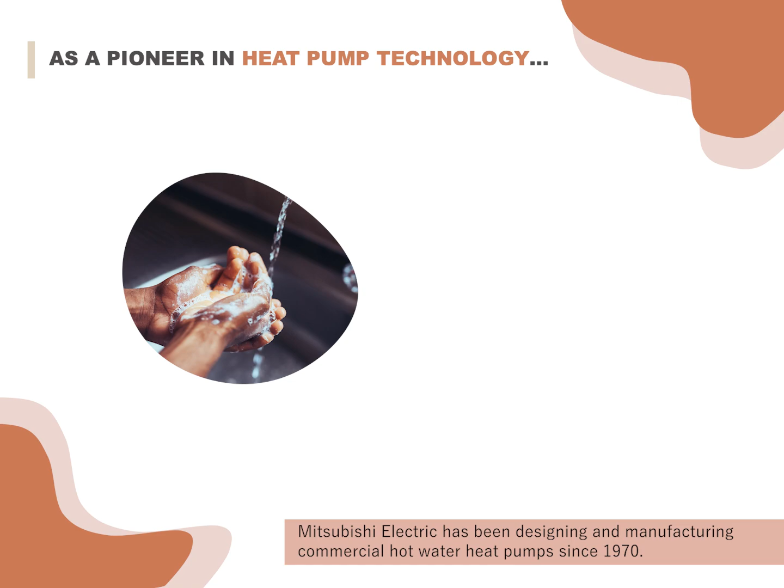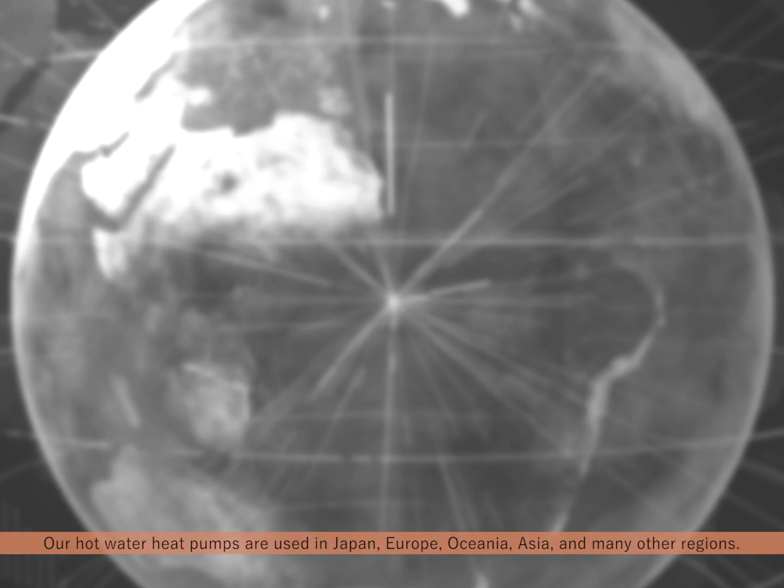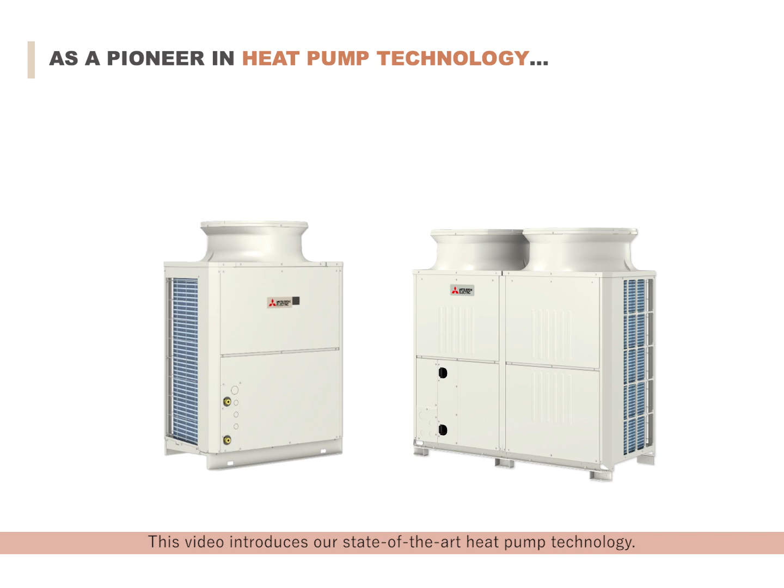Mitsubishi Electric has been designing and manufacturing commercial hot water heat pumps since 1970. We were one of the first manufacturers in Japan to utilize heat pump technology to supply hot water. Our hot water heat pumps are used in Japan, Europe, Oceania, Asia, and many other regions. As a pioneer in heat pump technology, we would continue to lead the industry. This video introduces our state-of-the-art heat pump technology.

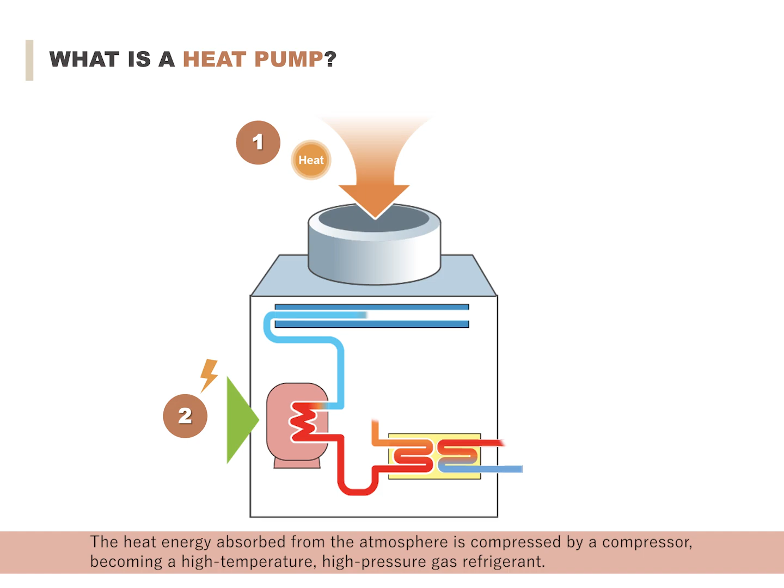First, let us explain how heat pumps work. Heat pumps absorb heat energy from the atmosphere and transfer this energy into refrigerant. The heat energy absorbed from the atmosphere is compressed by a compressor, becoming a high-temperature, high-pressure gas refrigerant. Then the gas exchanges heat with incoming water through a heat exchanger. The water heated by the heat exchange is stored in a tank and used when hot water is supplied.

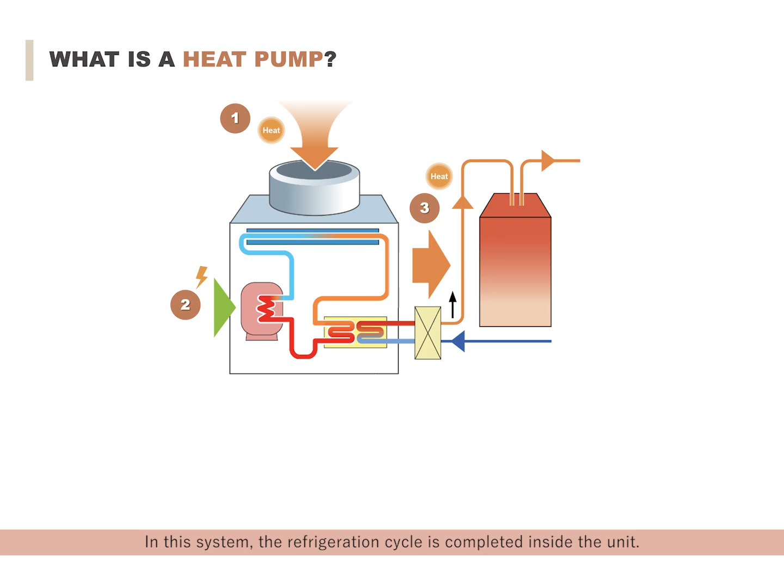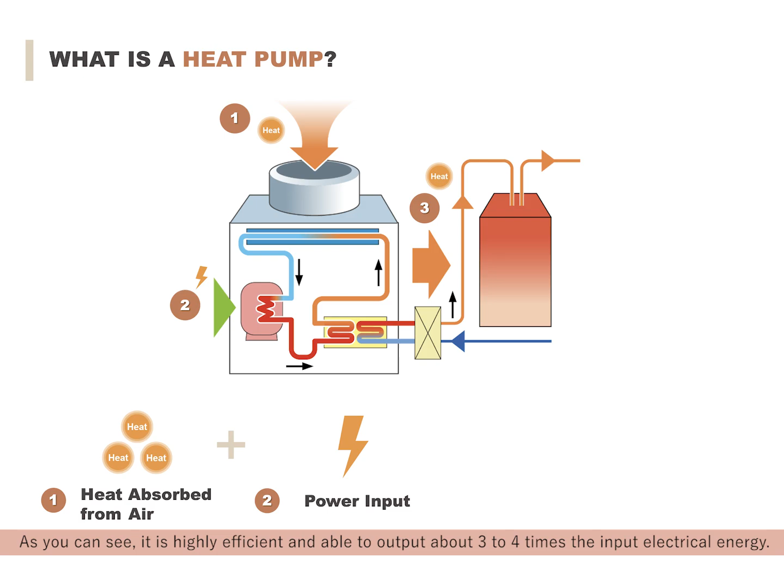In this system, the refrigeration cycle is completed inside the unit. Therefore, the refrigerant does not go to the tank or to the place where you use hot water. As you can see, it is highly efficient and able to output about 3 to 4 times the input electrical energy.

What are the benefits of heat pumps? Firstly, since heat pumps heat water with electricity, you can contribute to a significant reduction in CO2 emissions. Secondly, heat pumps are safe and clean thanks to the non-combustion system which does not discharge toxic substances.

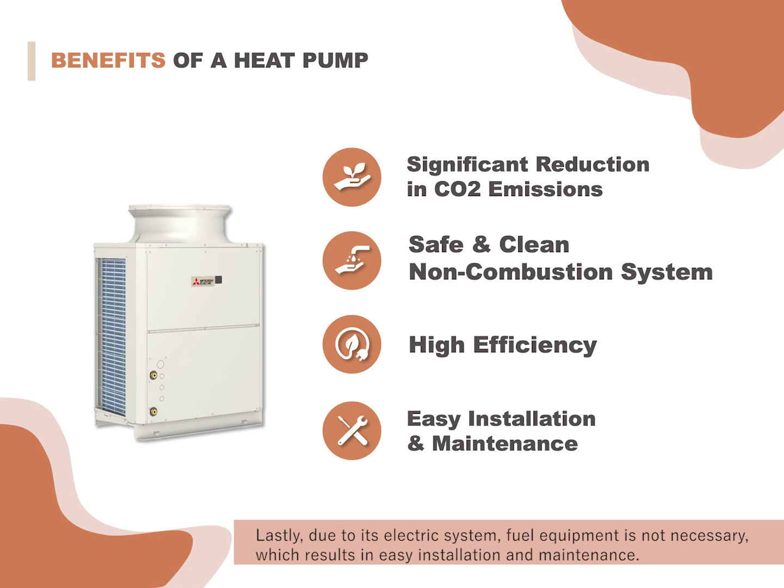Additionally, heat pumps output 3 to 4 times the input electrical energy, so their high efficiency allows you to reduce running costs. Lastly, due to its electric system, fuel equipment is not necessary, resulting in easy installation and maintenance. With a system controller, centralized control is also available, so you can remotely monitor each unit and adjust the desired temperature and amount of water.

Now let's look at the benefits of a heat pump more deeply compared to gas boilers and electric water heaters. To begin with, heat pumps' high energy efficiency is the most significant point. As for energy efficiency, gas boilers and electric water heaters are less efficient. Gas boilers are operated according to the load, resulting in frequent starts, stops and increased fuel consumption. Also, since electric water heaters use a heater, it inefficiently consumes electricity.

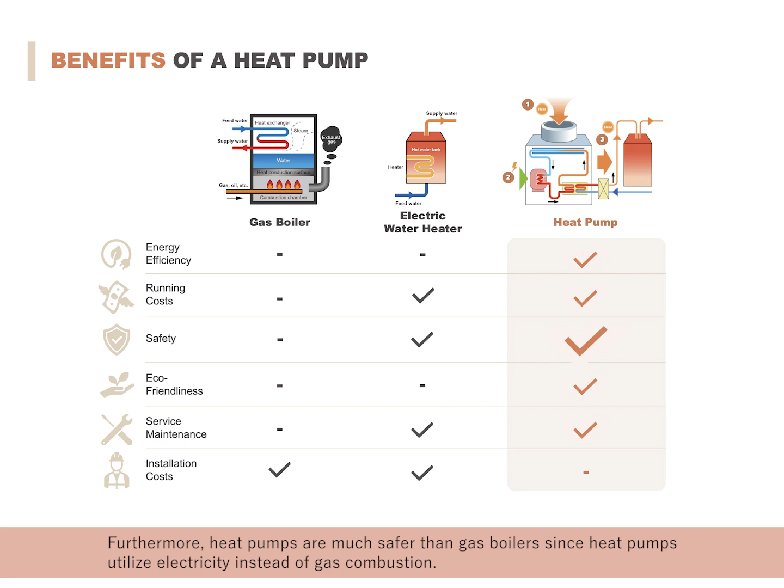On the other hand, thanks to the heat pump system, we can achieve an output of about 3 to 4 times the input electrical energy. With the highly efficient heat pump system, you can significantly save the running costs. Furthermore, heat pumps are much safer than gas boilers since heat pumps utilize electricity instead of gas combustion. Heat pumps with no combustion system achieve less emission of CO2, contributing to eco-friendliness.

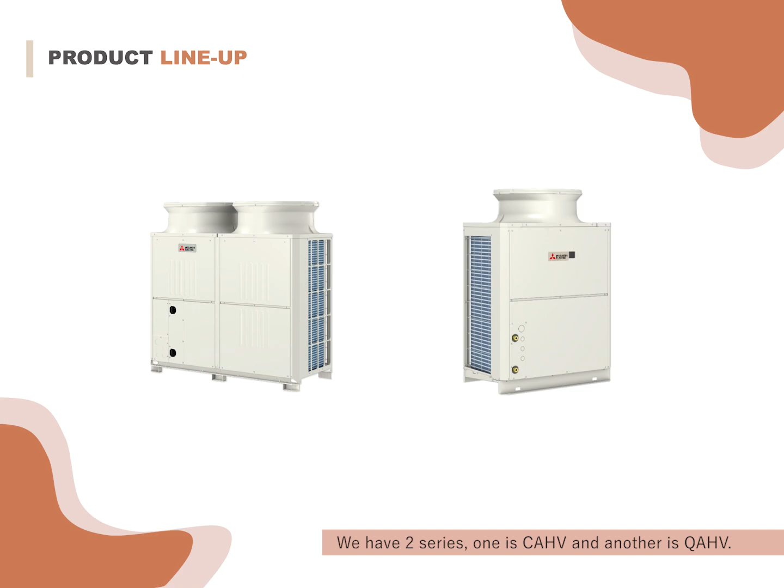Here is our product lineup of hot water heat pumps. We have 2 series, one is CAHV and another is QAHV. The biggest difference is the available outlet hot water temperature. While CAHV can achieve 70 degrees Celsius with R454C refrigerant, QAHV can achieve 90 degrees Celsius with R744 refrigerant.

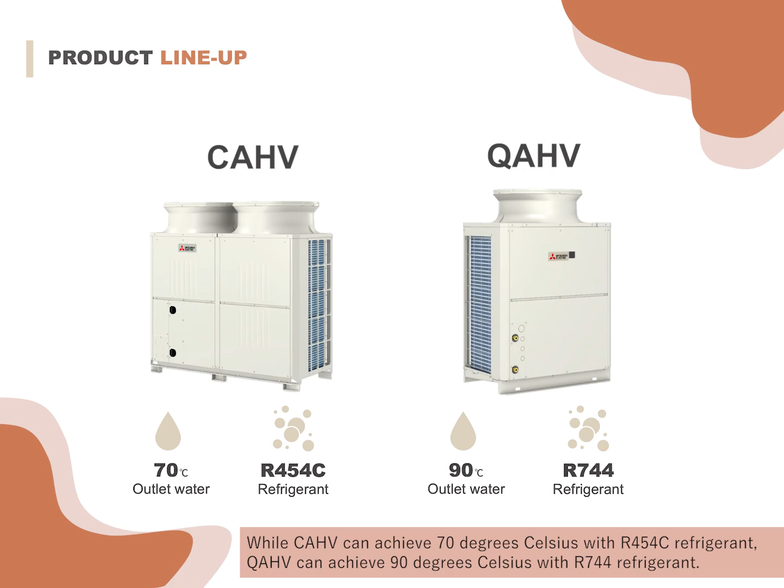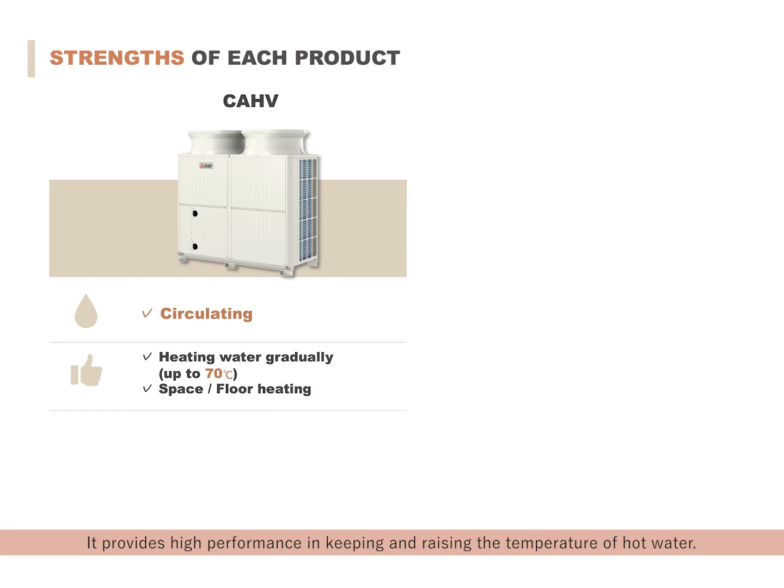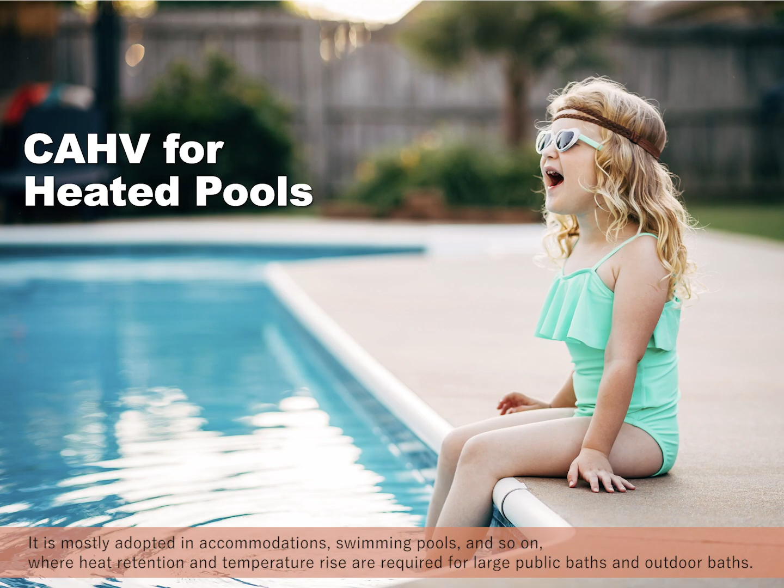Let us briefly explain our 2 types of hot water heat pumps. On the left is CAHV, a circulating hot water heat pump. It provides high performance in keeping and raising the temperature of hot water. It is mostly adopted in accommodations, swimming pools, and so on, where heat retention and temperature rise are required for large public baths and outdoor baths. Not only that, it is utilized for space and floor heating when connected to radiators on site.

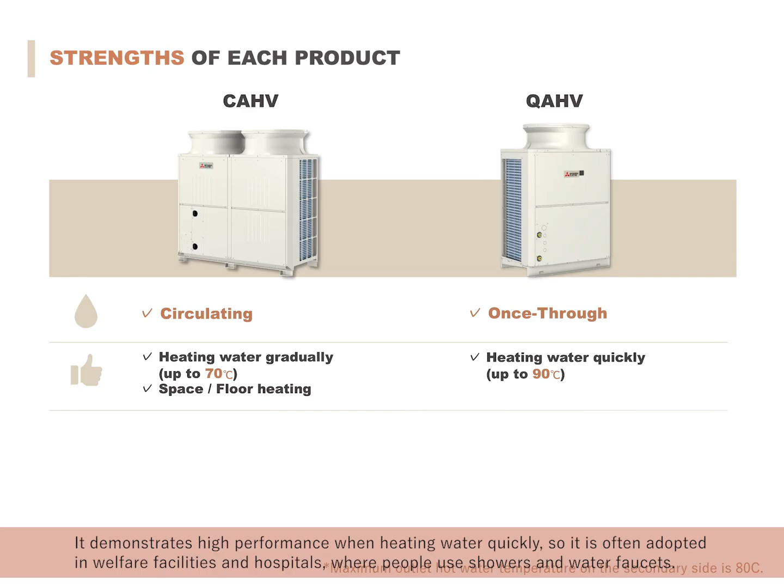On the right is QAHV, a once-through hot water heat pump. It demonstrates high performance when heating water quickly, so it is often adopted in welfare facilities and hospitals, where people use showers and water faucets. Thanks to these features, we can offer suitable products to each facility depending on the purpose.

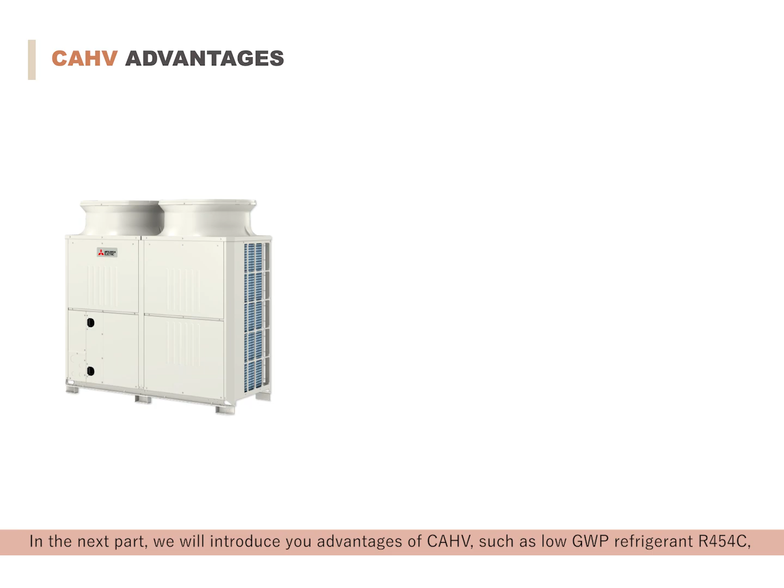Now let's look at each product more deeply. In the next part, we will introduce you to the advantages of CAHV, such as low GWP refrigerant R454C, new compressor, wide temperature range, highly efficient control, and low maintenance and design flexibility.

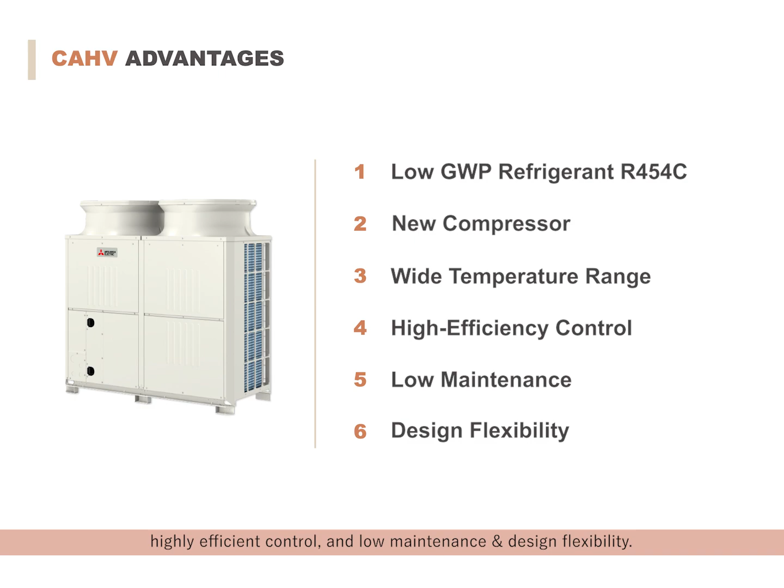Our CAHV adopts the low global warming potential refrigerant R454C. Thanks to this eco-friendly refrigerant, we contribute to the significant reduction of CO2 emissions. In Europe, the F-gas regulation is going to be implemented to prevent global warming and unwanted climate changes.

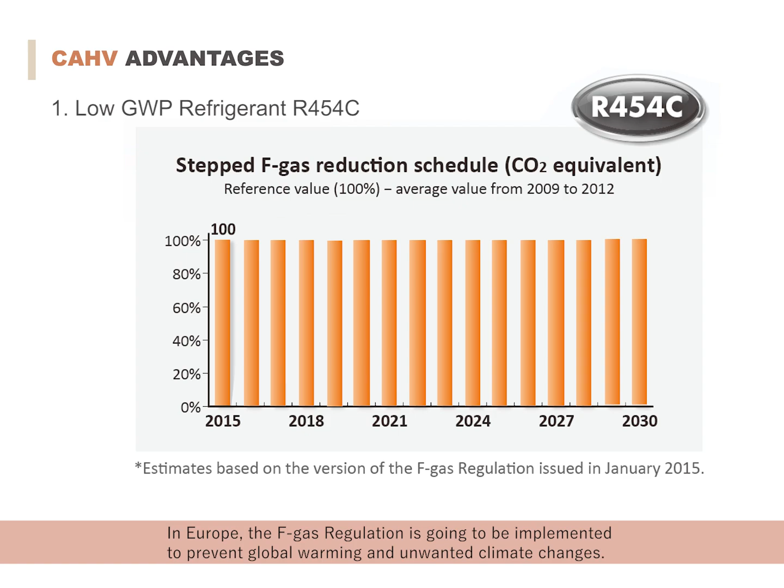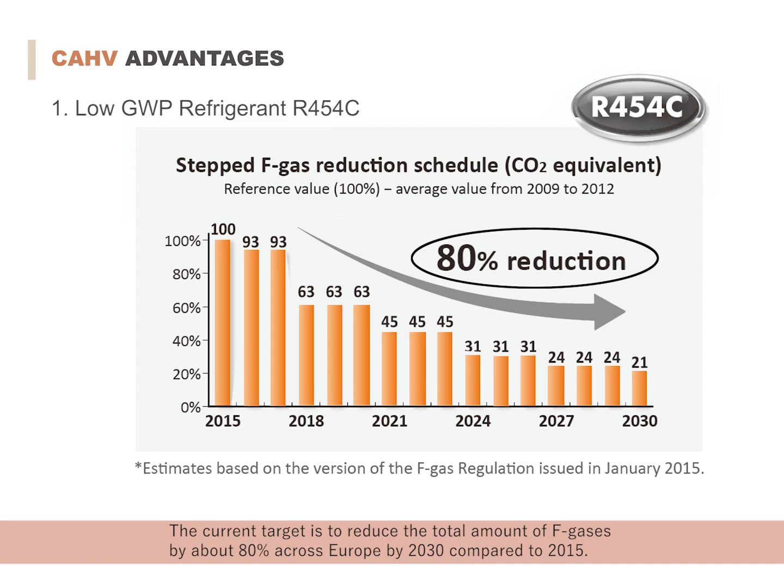The current target is to reduce the total amount of F gases by about 80% across Europe by 2030 compared to 2015. Now we offer more environmentally friendly hot water heat pumps that use the low GWP refrigerant R454C. The GWP of R454C is 148, and this is approximately 91% lower than the R407C refrigerant that is used in the conventional model.

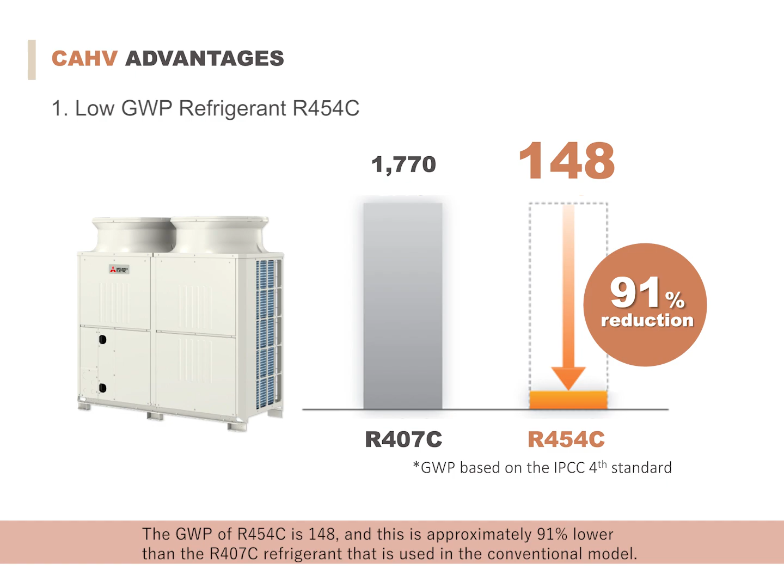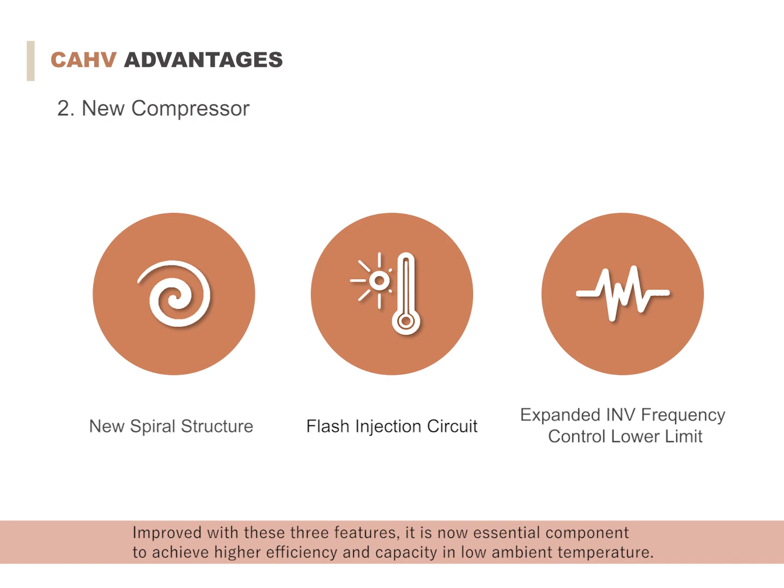One of the most important key technologies is our new compressor compatible with R454C refrigerant. Improved with these three features, it is now an essential component to achieve higher efficiency and capacity in low ambient temperature.

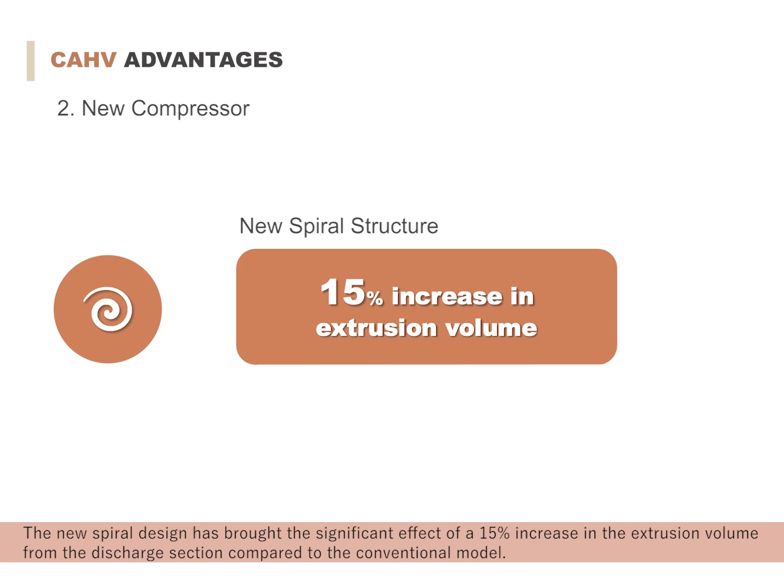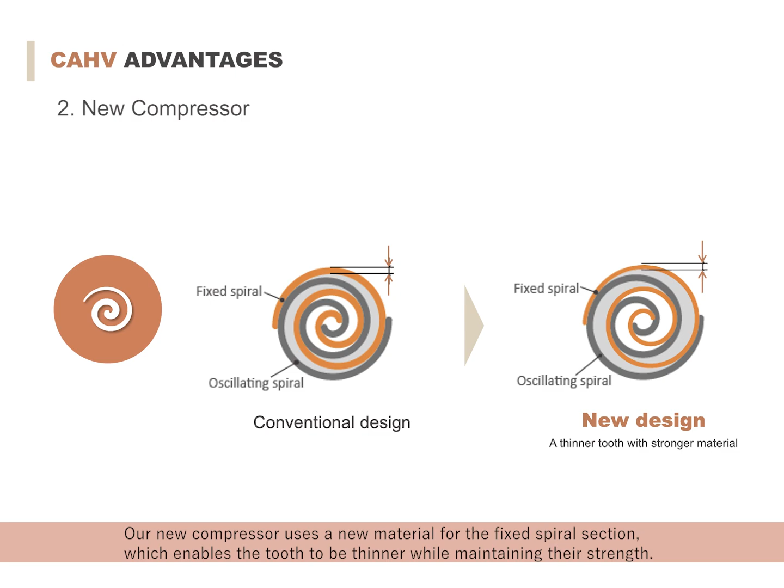Let's go through one by one. One of the crucial aspects is the new spiral structure. The new spiral design has brought the significant effect of a 15% increase in the extrusion volume from the discharge section compared to the conventional model. The low density of R454C refrigerant requires an increased amount of refrigerant from the discharge section. Our new compressor uses a new material for the fixed spiral section, which enables the tooth to be thinner while maintaining their strength.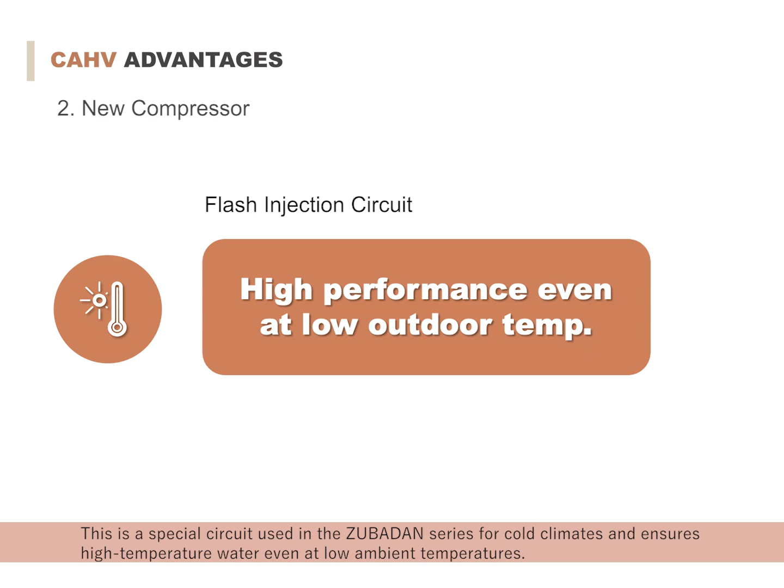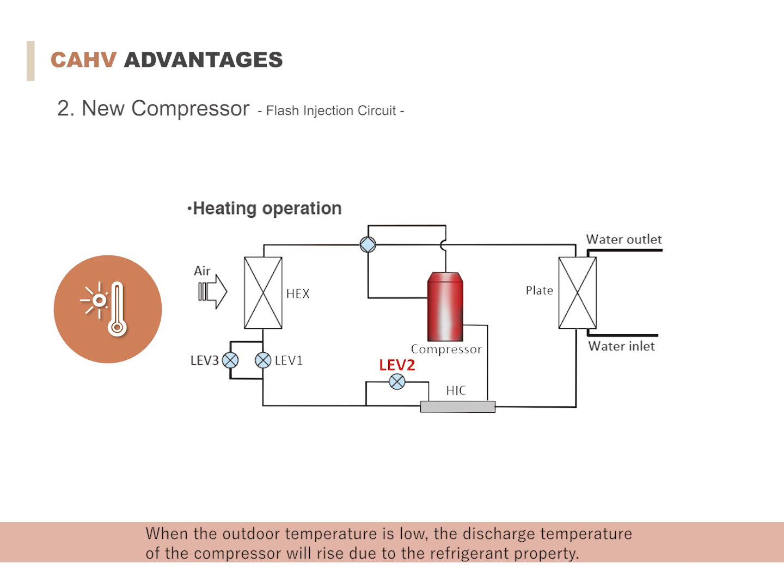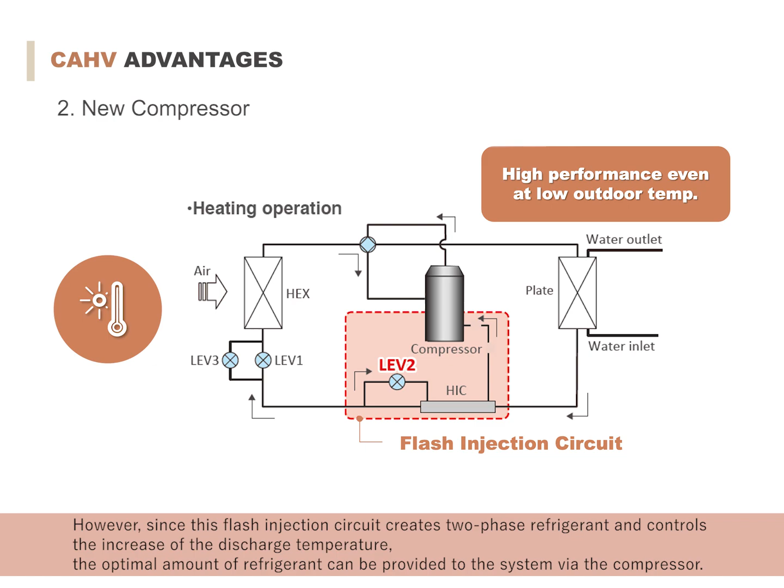Secondly, Mitsubishi Electric's unique technology, the flash injection circuit, is adopted. This is a special circuit used in the ZUBADAN series for cold climates and ensures high-temperature water even at low ambient temperatures. When the outdoor temperature is low, the discharge temperature of the compressor will rise due to refrigerant property, causing energy inefficiency and malfunction. However, since this flash injection circuit creates two-phase refrigerant and controls the increase of discharge temperature, the optimal amount of refrigerant can be provided to the system via the compressor.

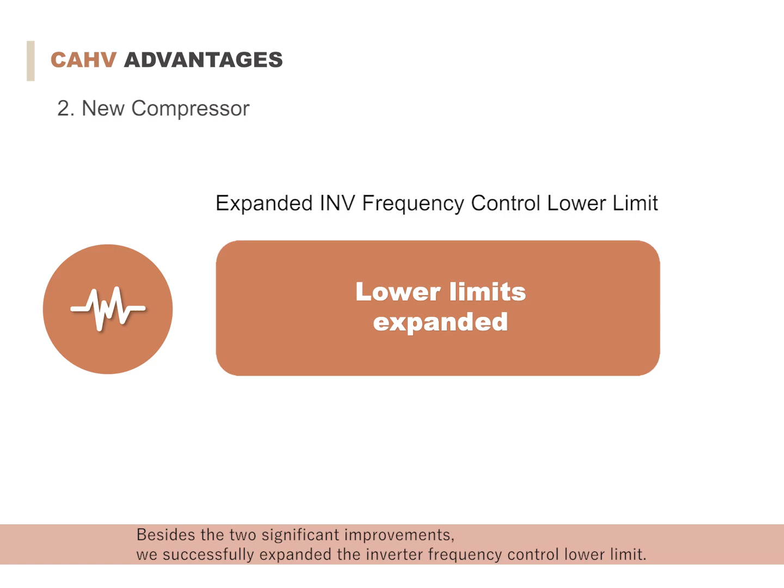Besides these two significant improvements, we successfully expanded the inverter frequency control lower limit. This expanded lower limit control helps minimize thermo on-off frequency during low load operations, such as in intermediate seasons, and improves energy efficiency.

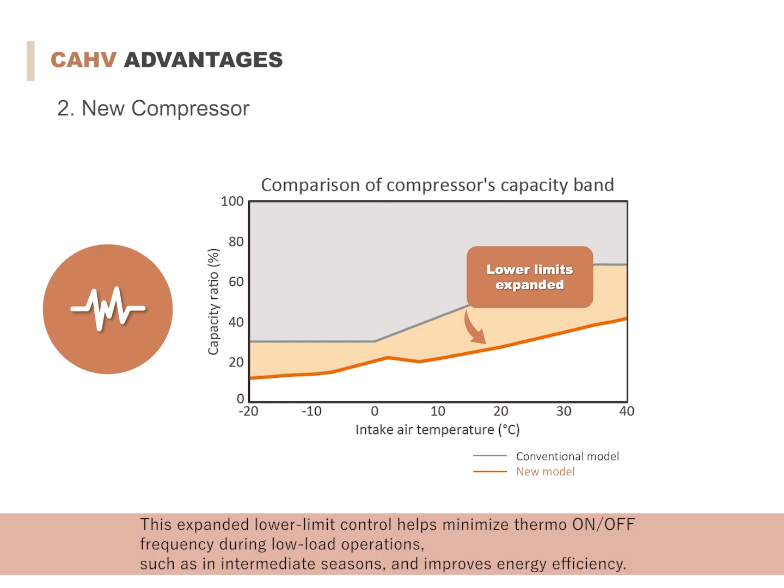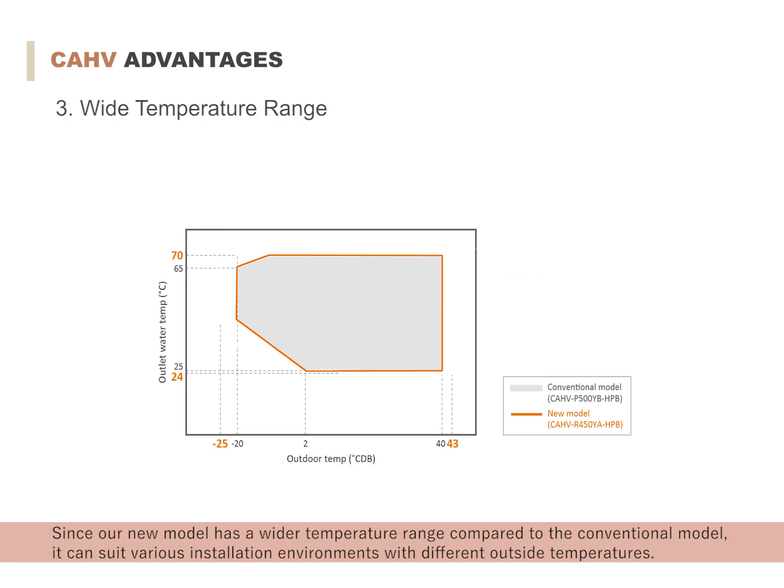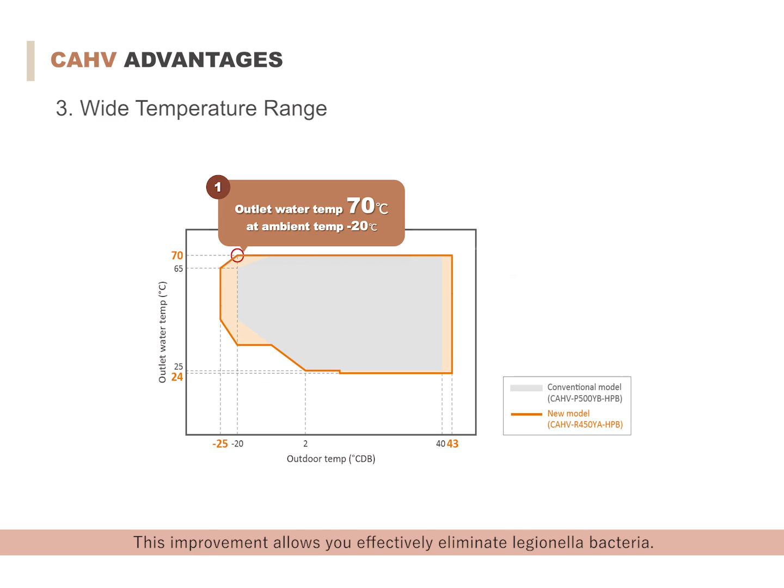Next, let us show you the wide temperature range. Since our new model has a wider temperature range compared to the conventional model, it can suit various installation environments with different outside temperatures. Firstly, the lower outdoor temperature limit for outlet water of 70 degrees Celsius has been expanded from -10 to -20 degrees Celsius. This improvement allows you to effectively eliminate Legionella bacteria.

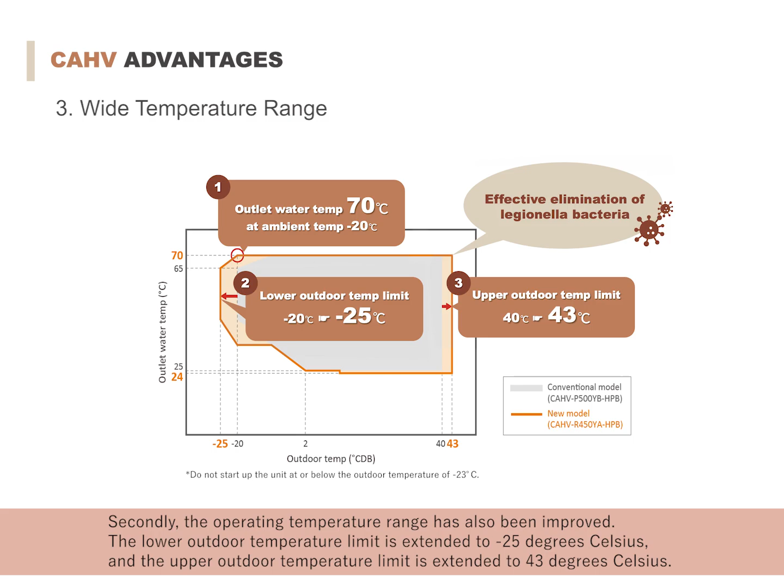Secondly, the operating temperature range has also been improved. The lower outdoor temperature limit is extended to -25 degrees Celsius, and the upper outdoor temperature limit is extended to 43 degrees Celsius. CAHV is also equipped with a highly efficient control system.

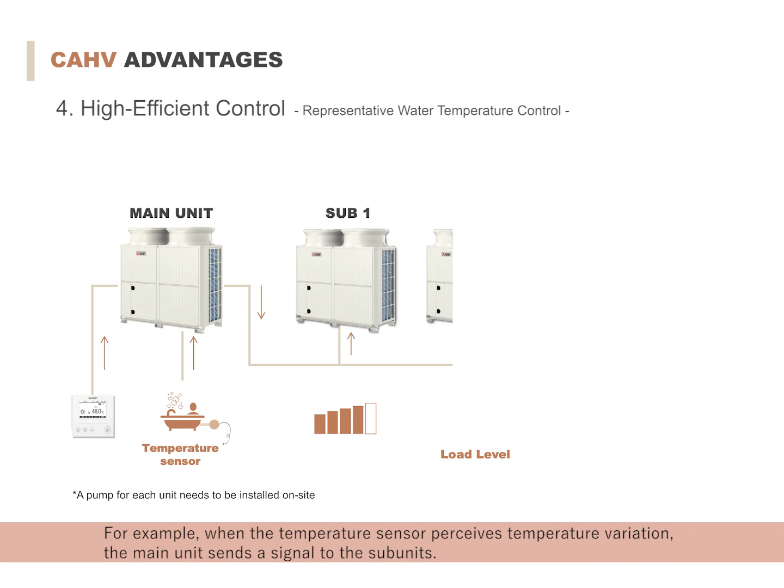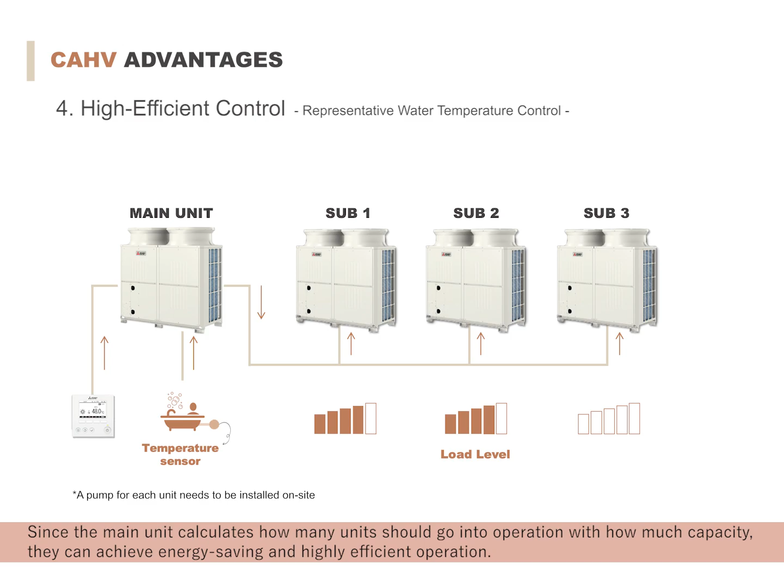According to the load, the main unit can control the number of operation units. For example, when the temperature sensor perceives temperature variation, the main unit sends a signal to the subunits. Since the main unit calculates how many units should go into operation with how much capacity, they can achieve energy saving and highly efficient operation.

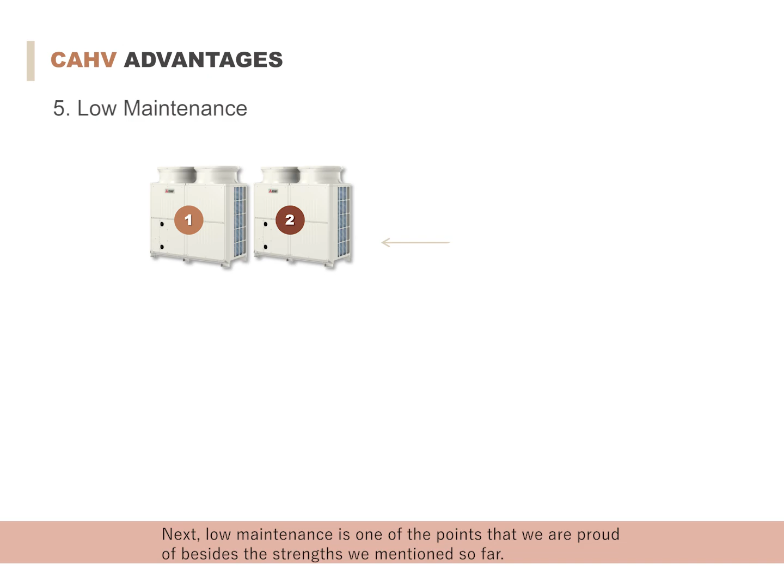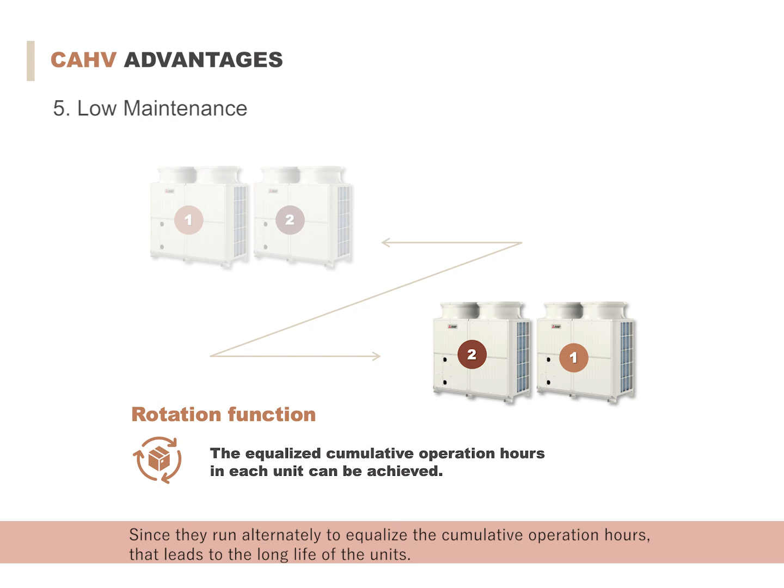Next, low maintenance is one of the points that we are proud of besides the strengths we mentioned so far. When two or more units are in the system, the units run alternately, ensuring an optimum product lifecycle for both component units. Since they run alternately to equalize the cumulative operation hours, that leads to a long life of the units.

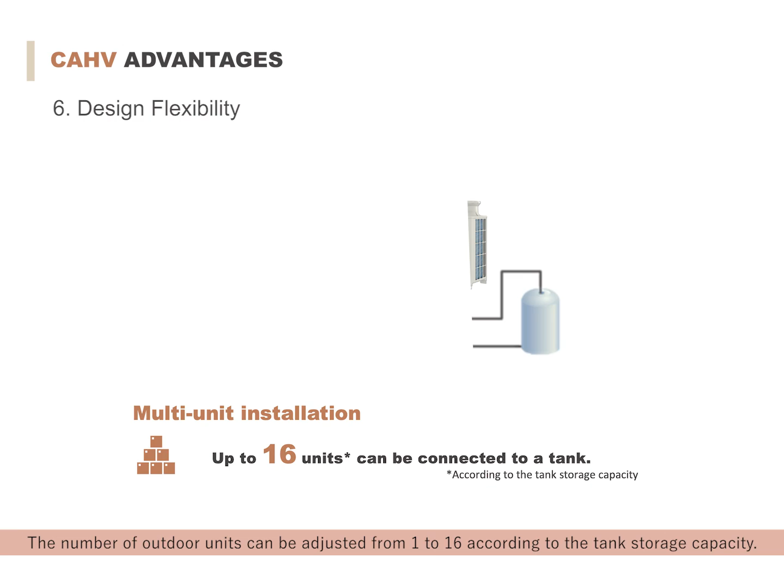Lastly, design flexibility contributes to the CAHV's advantages. The number of outdoor units can be adjusted from 1 to 16 according to the tank storage capacity. Therefore, depending on the loads on site, it can flexibly meet the design requirements.

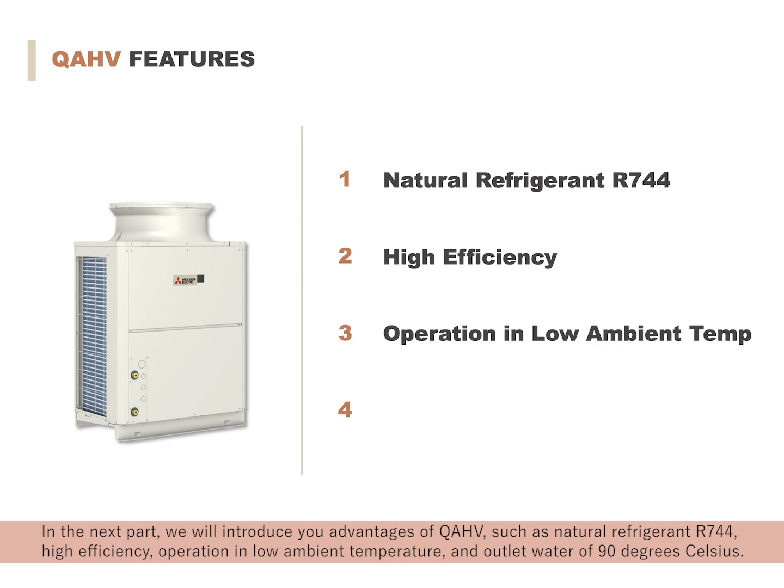Now let's move on to QAHV. In the next part, we will introduce you to the advantages of QAHV, such as natural refrigerant R744, high efficiency, operation in low ambient temperature, and outlet water of 90 degrees Celsius.

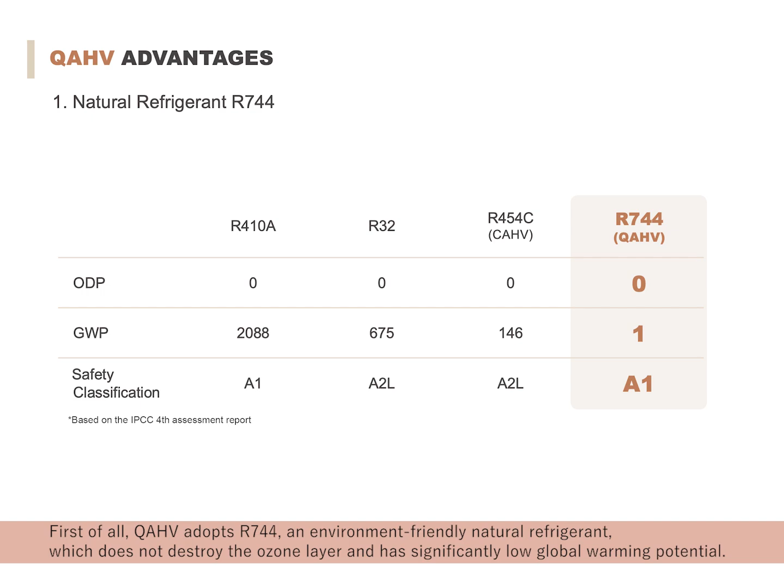First of all, QAHV adopts R744, an environment-friendly natural refrigerant, which does not destroy the ozone layer and has significantly low global warming potential. With this CO2 refrigerant, QAHV can contribute to the reduction of CO2 emissions.

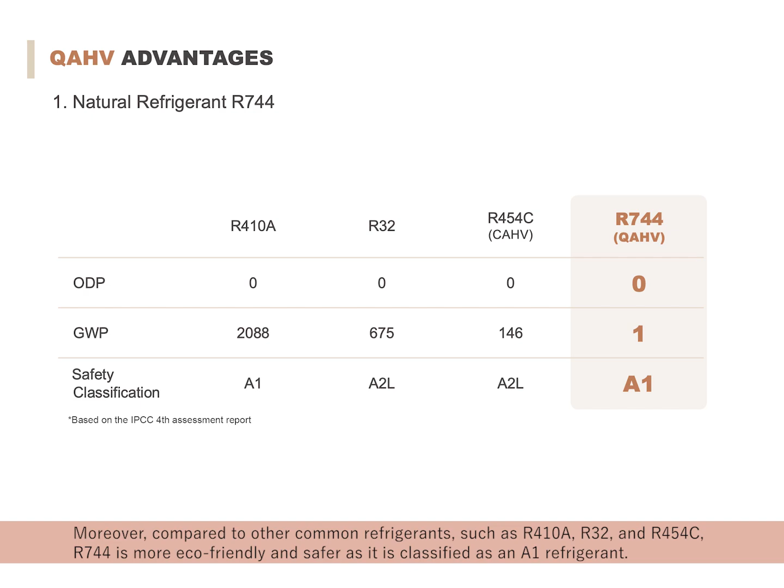Moreover, compared to other common refrigerants, such as R410A, R32, and R454C, R744 is more eco-friendly and safer as it is classified as an A1 refrigerant. Since A1 refrigerant is defined as non-flammable and low toxicity, R744 is much more reliable.

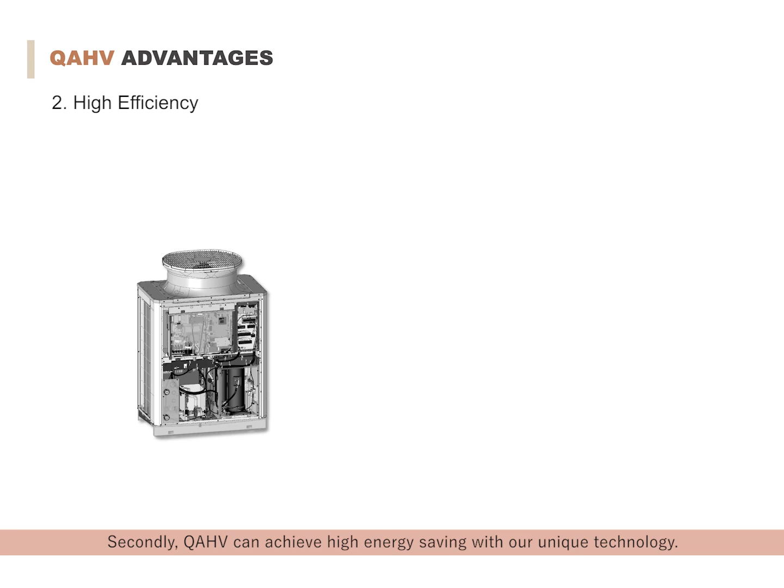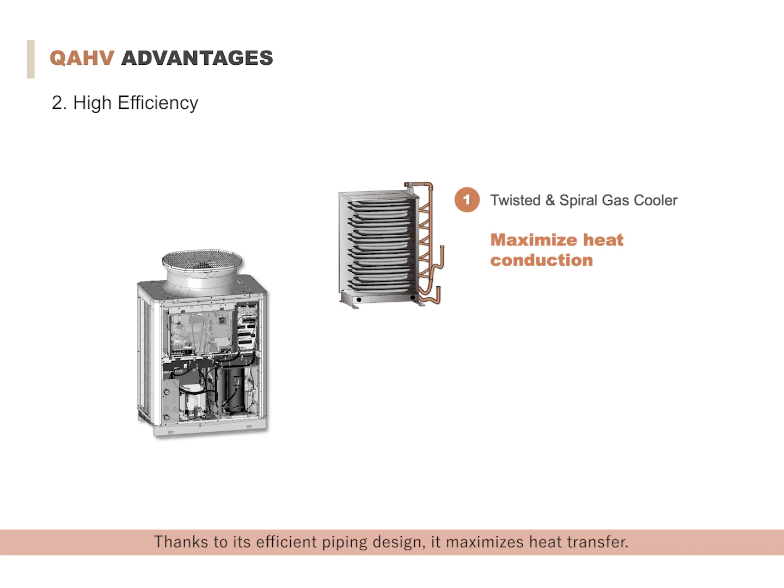Secondly, QAHV can achieve high energy saving with our unique technology. QAHV utilizes a twisted and spiral gas cooler, which is Mitsubishi Electric's state-of-the-art technology. Thanks to its efficient piping design, it maximizes heat transfer. Furthermore, equipped with the latest inverter scroll compressor, QAHV can significantly increase the annual efficiency which fixed-speed systems cannot achieve.

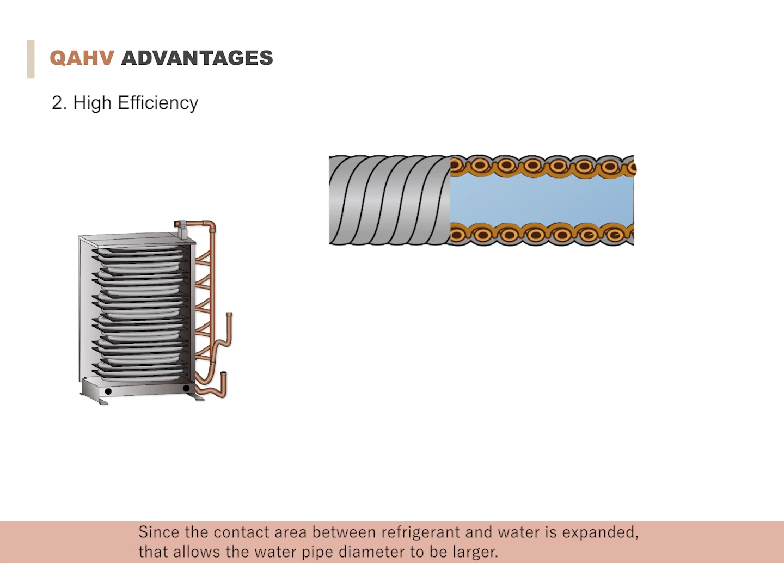Let us explain more about the role of the twisted and spiral gas cooler. The three connected refrigerant pipes are wound around the twisted water pipe. Since the contact area between refrigerant and water is expanded, that allows the water pipe diameter to be larger. This can avoid scale adhesion, preventing efficiency drop. In addition, the expanded contact area maximizes heat transfer and contributes to enhanced efficiency.

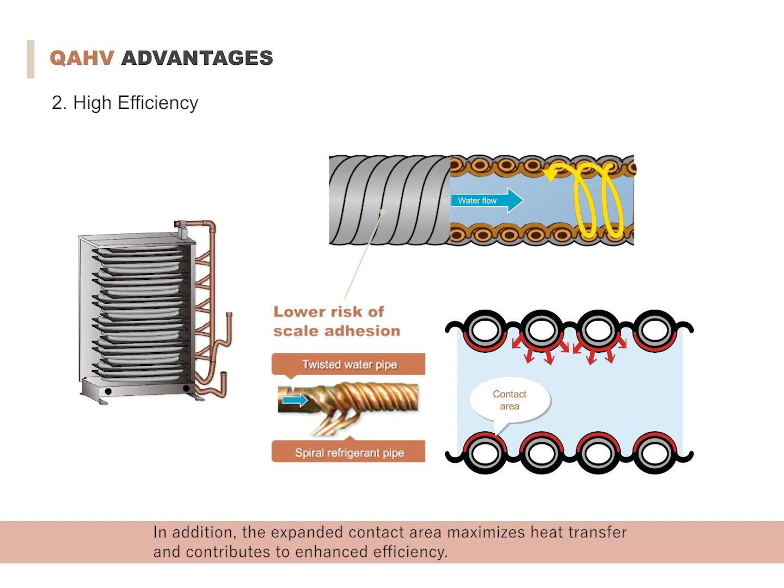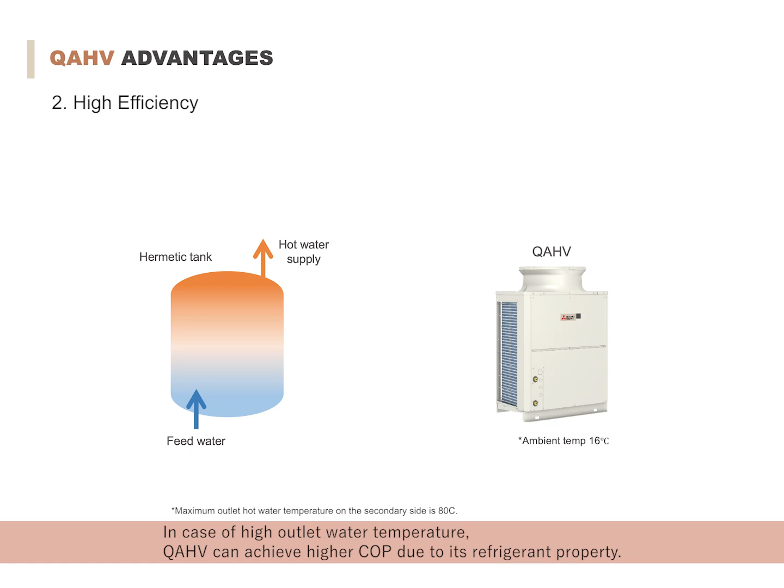Due to this high efficiency, the downsized casing is realized, attracting customers who focus on smaller installation space. In case of high outlet water temperature, QAHV can achieve higher COP due to its refrigerant property.

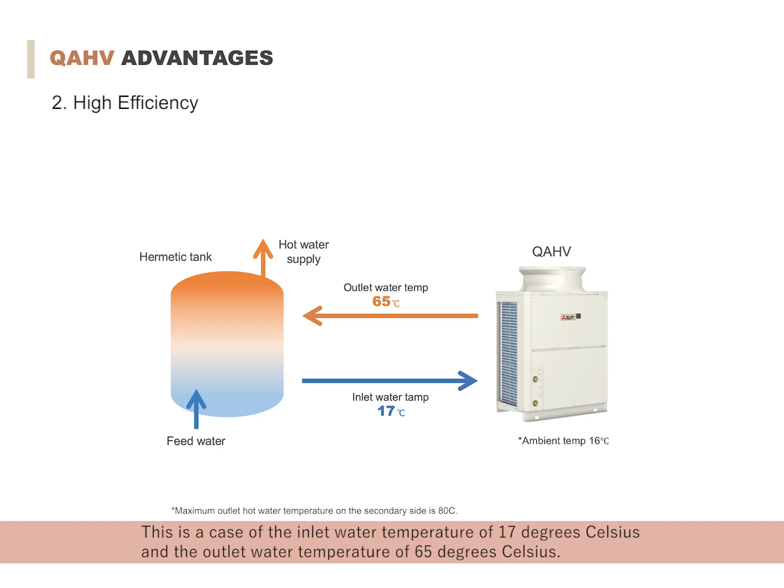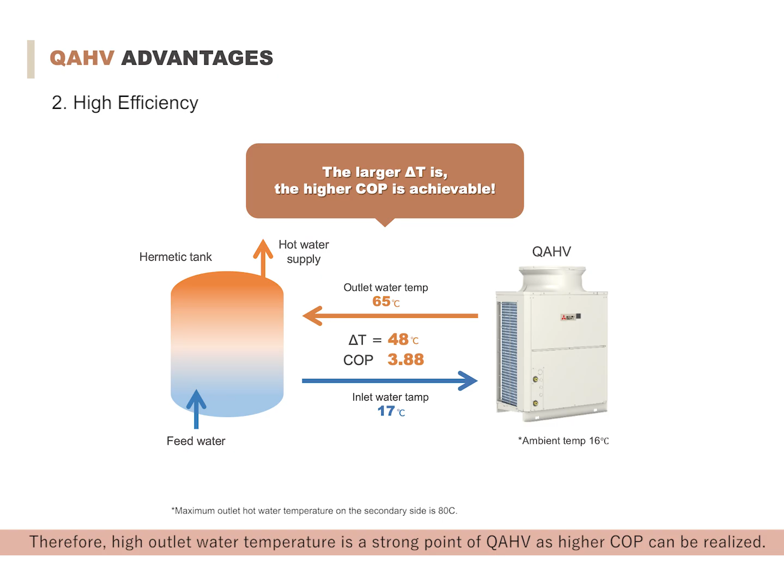Let's take a look at an example. This is a case of the inlet water temperature of 17 degrees Celsius and the outlet water temperature of 65 degrees Celsius. As the diagram shows, when the delta T is 48, the COP of 3.88 can be achievable. Therefore, high outlet water temperature is a strong point of QAHV as higher COP can be realized.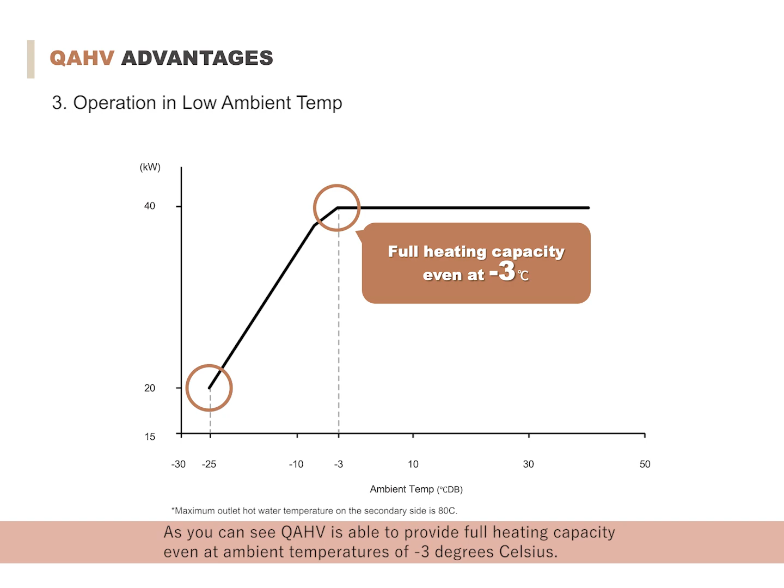Next, let us show you QAHV's year-round heating capacity in extreme climates. As you can see, QAHV is able to provide full heating capacity even at ambient temperatures of -3 degrees Celsius. Furthermore, the unit is operable and can supply 90 degrees Celsius of hot water in ambient temperatures as low as -25 degrees Celsius.

The technology behind this is an injection circuit that provides an optimum amount of refrigerant to the system. The refrigerant is provided through a specially designed injection port of the compressor, ensuring stable operation even in low ambient temperatures.

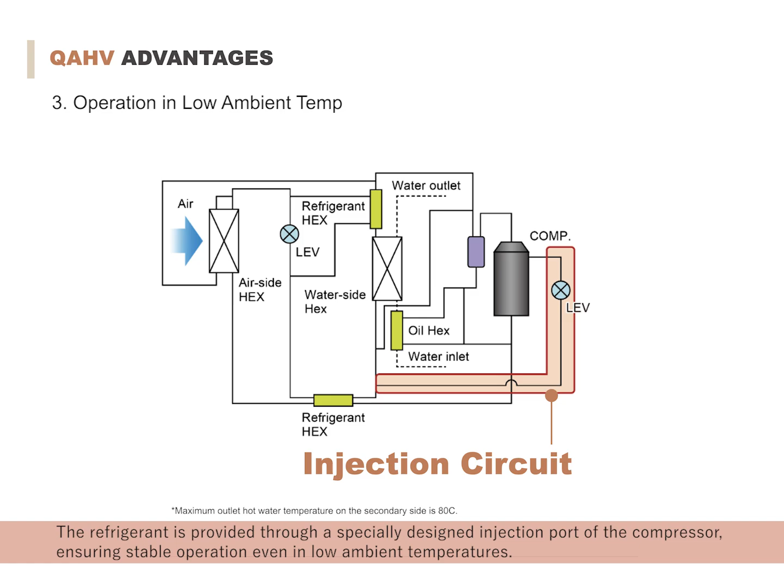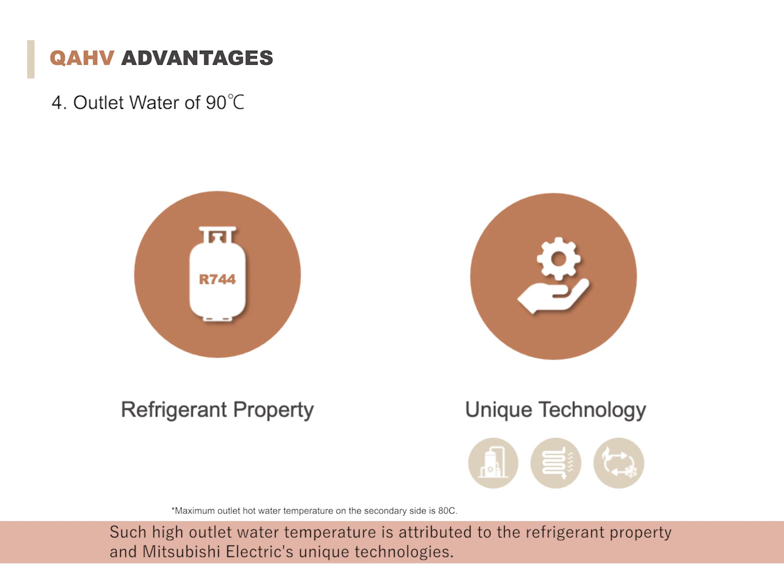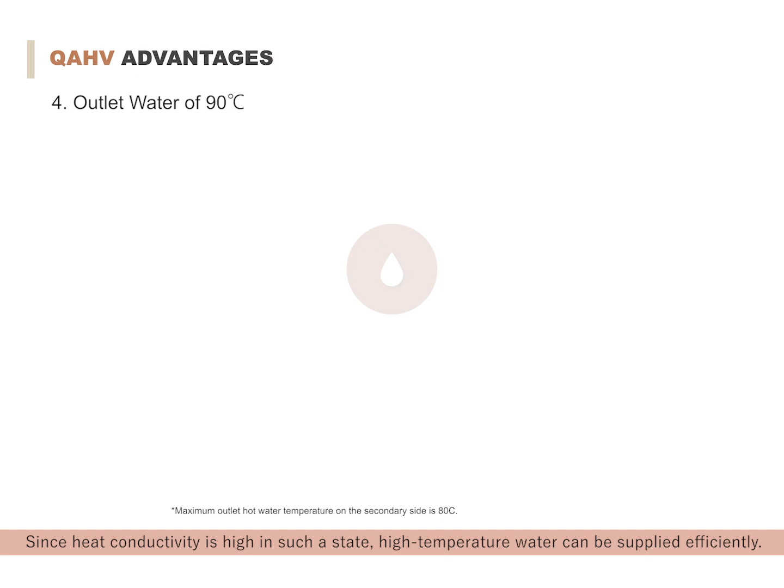Lastly, QAHV can supply high-temperature hot water of up to 90 degrees Celsius. Such high outlet water temperature is attributed to the refrigerant property and Mitsubishi Electric's unique technologies. R744, the CO2 refrigerant, is able to conduct efficient heat exchange in a supercritical state. Since heat conductivity is high in such a state, high-temperature water can be supplied efficiently.

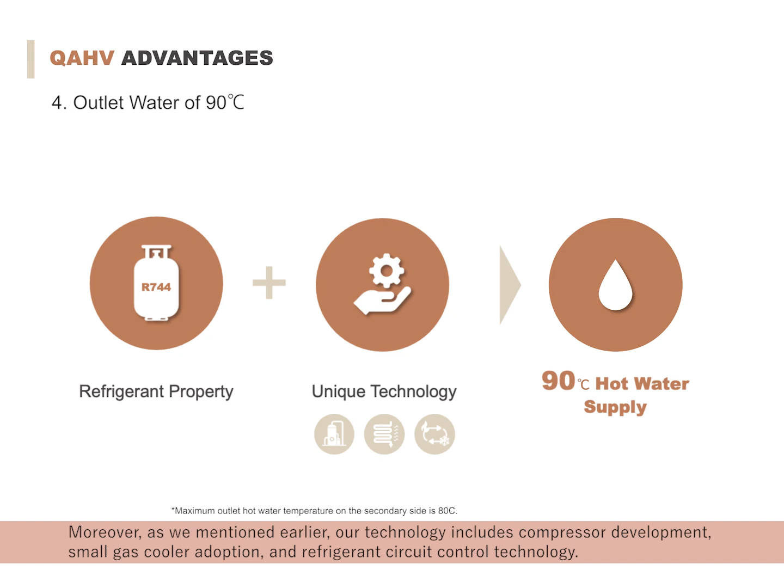Moreover, as we mentioned earlier, our technology includes compressor development, small gas cooler adoption, and refrigerant circuit control technology. Thanks to all these factors, hot water of 90 degrees Celsius can be provided successfully.

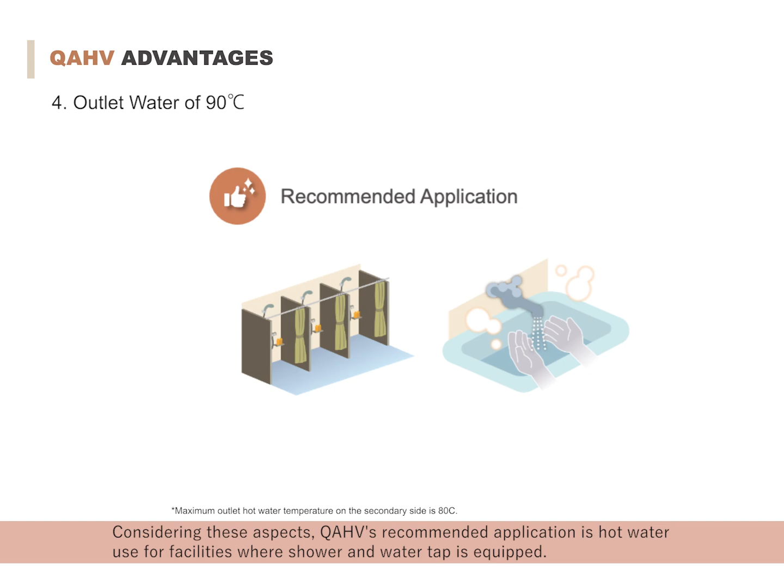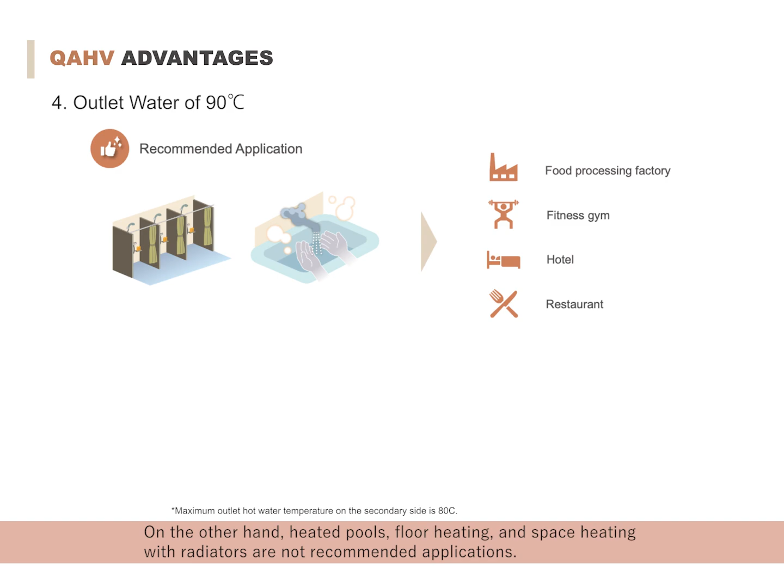Considering these aspects, QAHV's recommended application is hot water use for facilities where showers and water taps are equipped. QAHV can be promoted to various places, such as food processing factories, fitness gyms, hotels, restaurants, and so on. On the other hand, heated pools, floor heating, and space heating with radiators are not recommended applications.

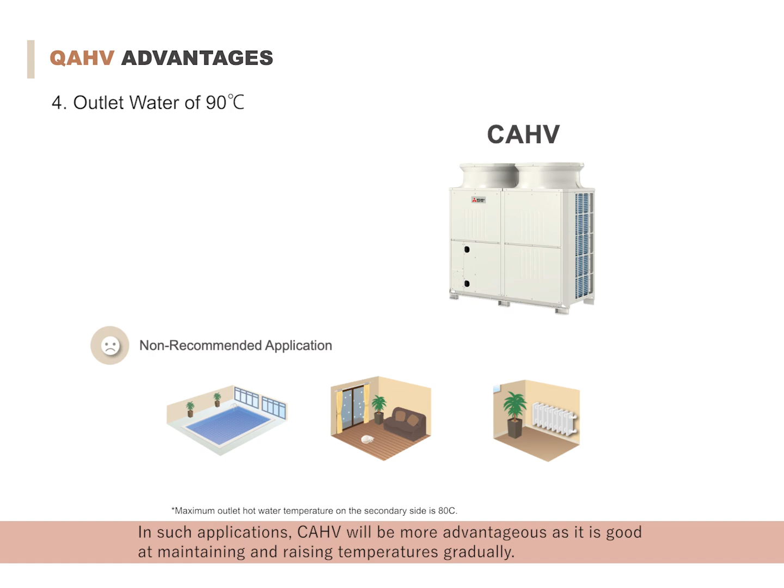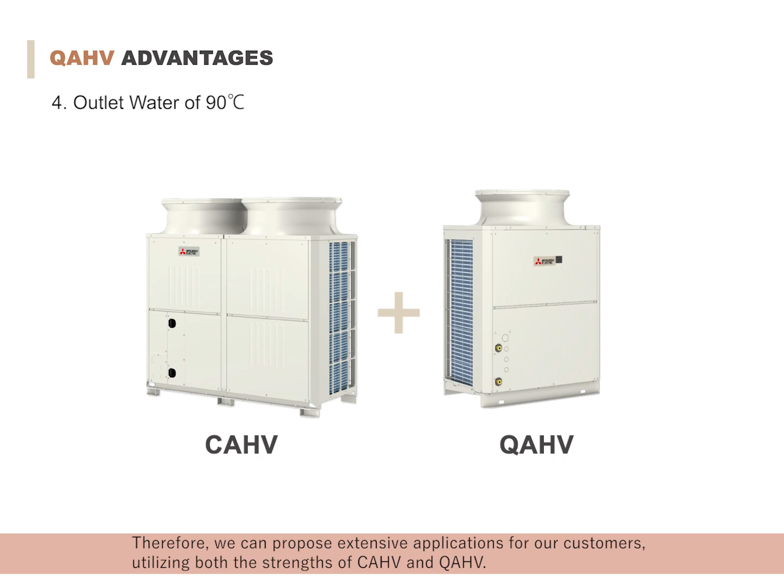In such applications, CAHV will be more advantageous as it is good at maintaining and raising temperatures gradually. Especially in larger-scale facilities, they must supply and retain a larger volume of hot water. In such cases, the combination of QAHV and CAHV can achieve greater energy savings. By combining QAHV and CAHV, you can take advantage of each strength. Therefore, we can propose extensive applications for our customers, utilizing both the strengths of CAHV and QAHV.